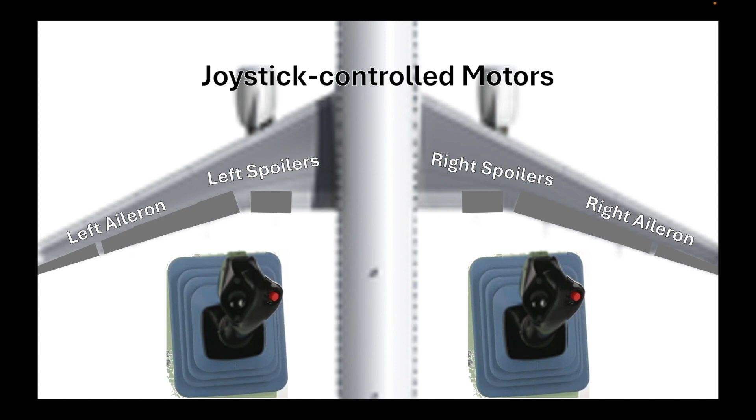If we look at the wings of an airplane carefully, you'll notice that there are ailerons at the outermost and spoilers at the innermost. To demonstrate what it means for a pilot to move the joystick of an Airbus 320 and how the wings would respond, let's look at this video.

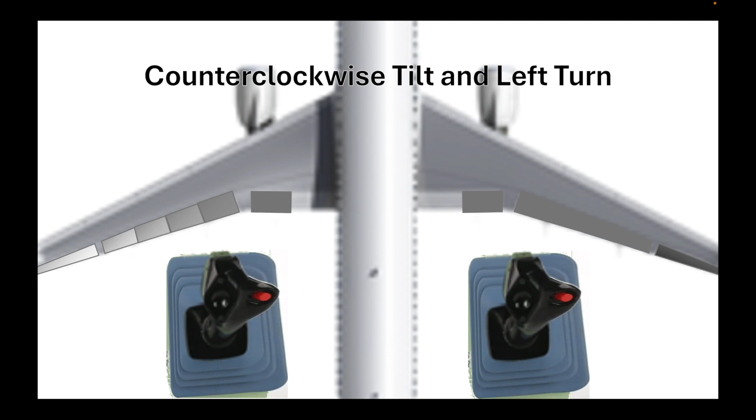If he moves the joystick to the left, the airplane would make a counterclockwise tilt because of the ailerons, where the left one will move up and the right one will move down, and a slight left turn because of the spoilers on the left that are being raised up, hence the spoileron effect.

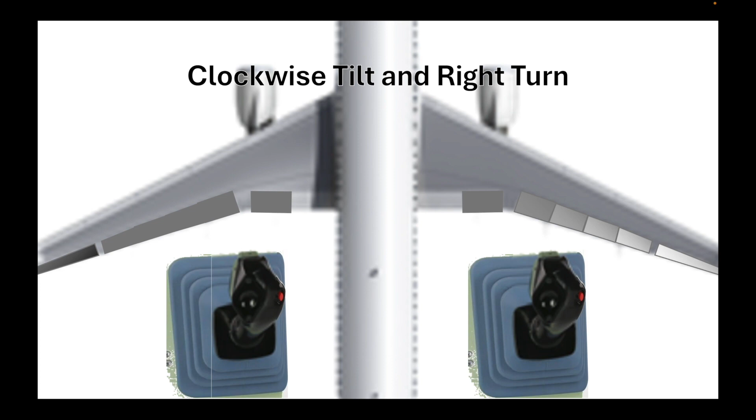In a similar manner, when the joystick is being moved to the right, the left aileron will go down and the right aileron will go up. Additionally, the spoilers on the right side will raise up. The overall vector force for this Airbus 320 in this mode is that it will make a clockwise tilt and a slight right turn.

When the joystick is being pulled backward, the airplane would pitch up. In a real Airbus 320, it's the elevator that will move up, not the flaps. But for the sake of demonstrating the wing movements, we will just imagine the ailerons as elevators. Since they're at the middle of the airplane, these ailerons would move downward, like flaps. Hence, flaperon mode: ailerons acting like flaps.

This creates an upward pitch. The elevators actually move upward at the back of the airplane.

During a downward pitch, when the joystick is being pushed forward, the elevator at the tail will move downward. But for the wing's sake, both ailerons will move upward.

Ailerons now acting like spoilers in spoileron mode. Since both ailerons are being moved upward, the spoilers on both sides of the wing will also move upward.

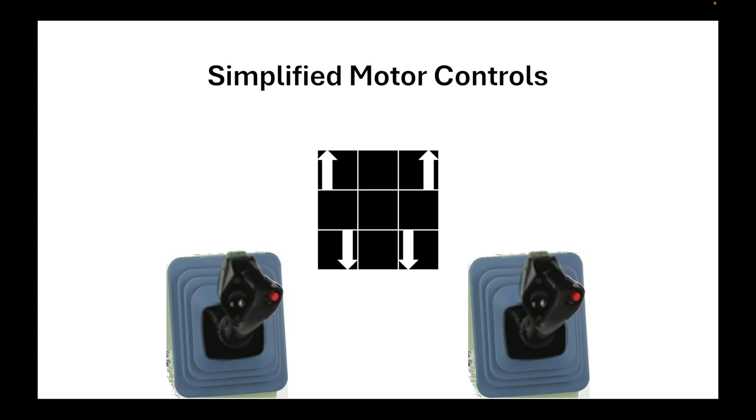It sounds like a confusing direction of the ailerons. Let's simplify the functions. That's the simplified motor controls, where only one aileron will move up or down, and in this case, the joystick will be moved on the corner: northwest, northeast, southwest, or southeast, not anymore north, south, east, or west. This makes it easier for us to create a fly-by-wire system for a model Airbus 320.

We have also simplified the wing design for this model. We only have 2 ailerons and 2 spoilers.

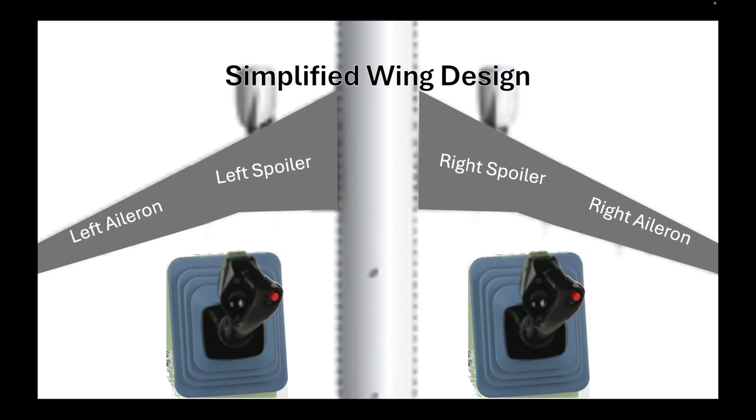When the airplane is being pitched upward and turned to the left, as well as tilting counterclockwise, only the right flaperon would move down. No other wing elements will move.

When the pitch is still upward and the tilt is clockwise and you're making a right turn, the left flaperon will move downward and no other wing elements will move.

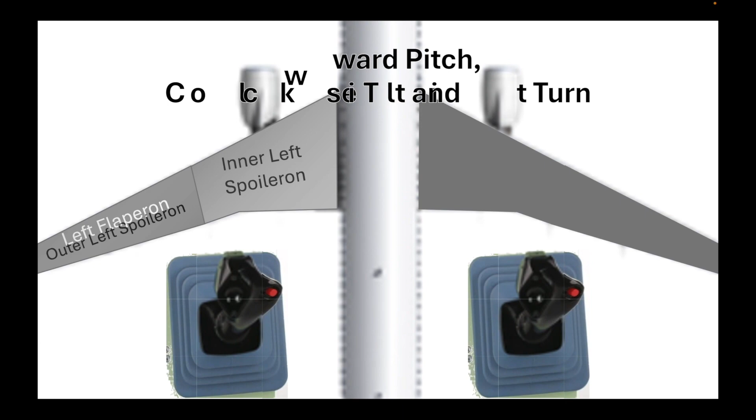But when you pitch downward, make a counterclockwise tilt and a left turn, the outer left spoileron will move upward as well as the inner left one. Essentially, all the left wing elements will go upward.

In a similar manner, when you continue to pitch downward, this time making a clockwise tilt and a right turn, the inner and outer right spoilerons will simultaneously go up. In other words, all of the right wing elements.

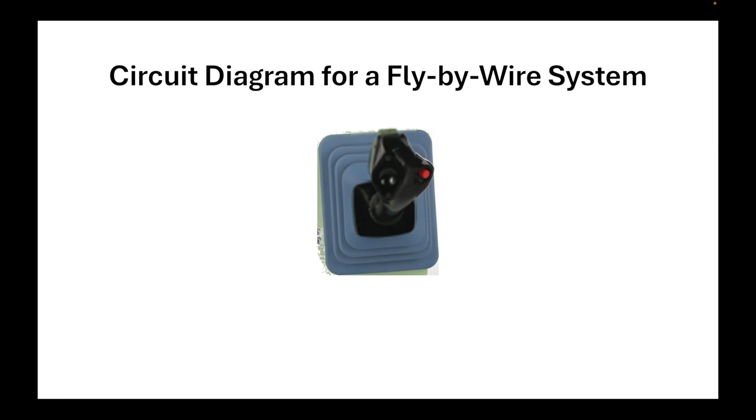There are 4 push buttons that are 4-pinned, wherein any of those 4 buttons have a corresponding aileron to move either upward or downward.

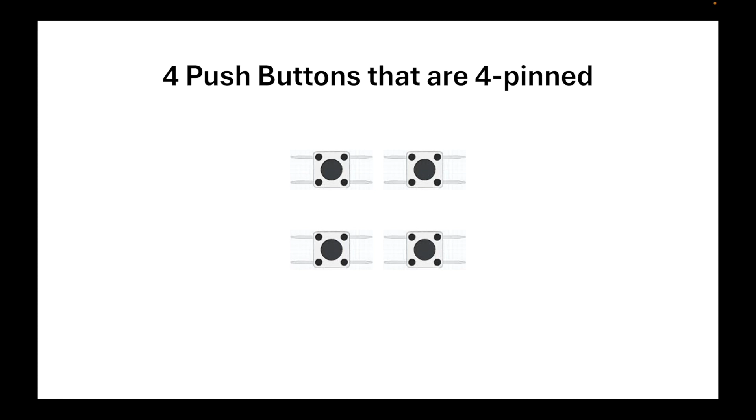You need 4 resistors that are 10 kilo ohms in resistance so that we can create an active high switch, wherein by default, the push button is in off mode. But when it's pressed, it turns on.

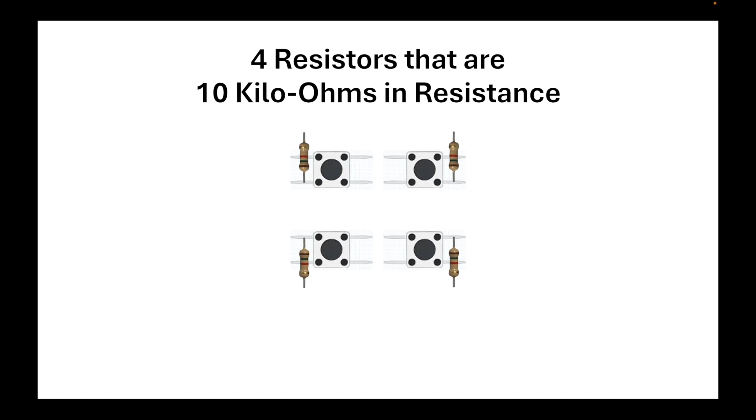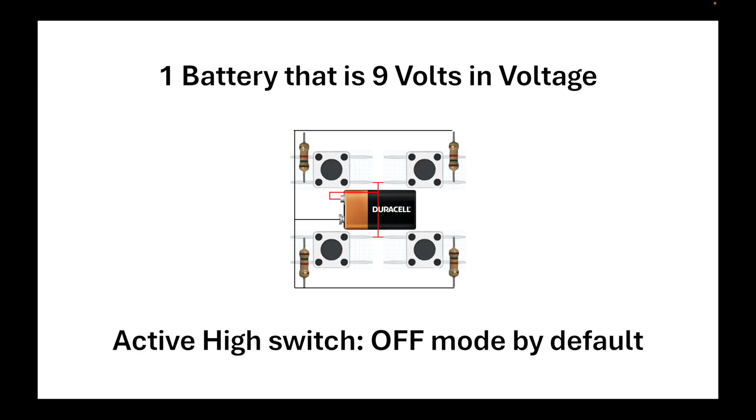We have to put one battery that is 9 volts in voltage so that we can create an active high switch for these 4 buttons. Those red lines refer to the positive terminal, while the black lines refer to the negative terminal.

After we have set up the battery, resistor, and push button, we will set an output for this fly-by-wire system using an integrated circuit that has 4 AND gates inside it. 1, 2, 3, and 4 refer to the output and input connections. They're physically connected, but to make it look cleaner in circuit appearance, we use triangles to represent those particular connections.

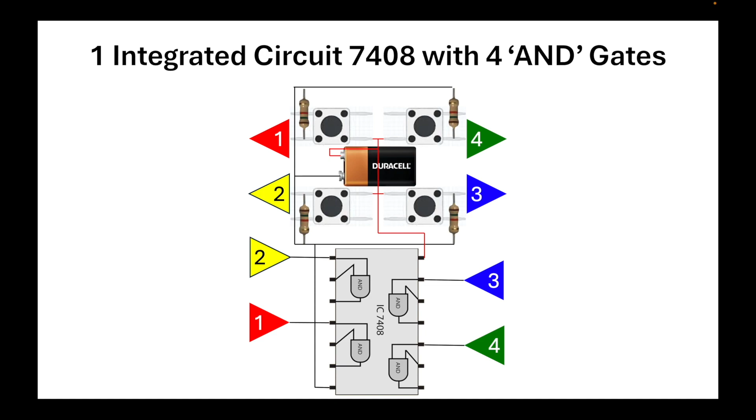We need another 4 push buttons that are 4-pinned so that the motor will not go on forever. Once it reaches its maximum deflection, either at the upward or downward most configuration, the motor will stop at a certain point. For these 4 push buttons, we will be using an active low switch that is on by default and off when it's being pushed, meaning that it has the reverse circuit of an active high switch.

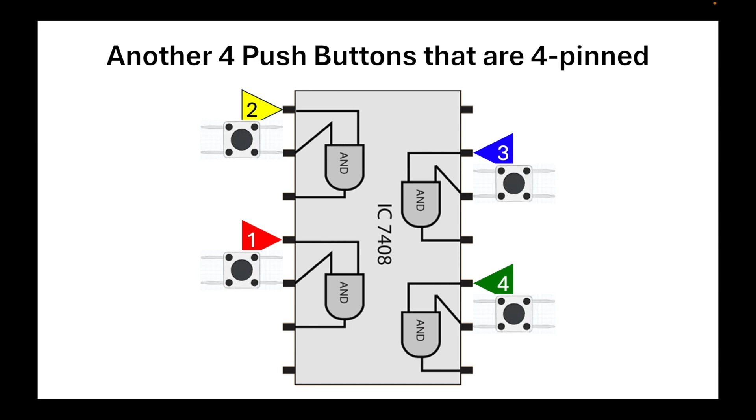We need another 4 resistors again that is 10 kilo ohms in resistance to protect the push buttons from getting destroyed. We use push button triggered outputs for conditional motor spinning, where the motor has a maximum upward or downward deflection to move those wings individually.

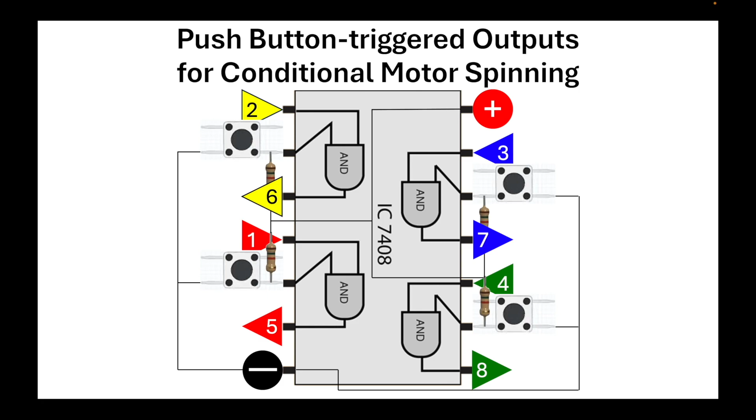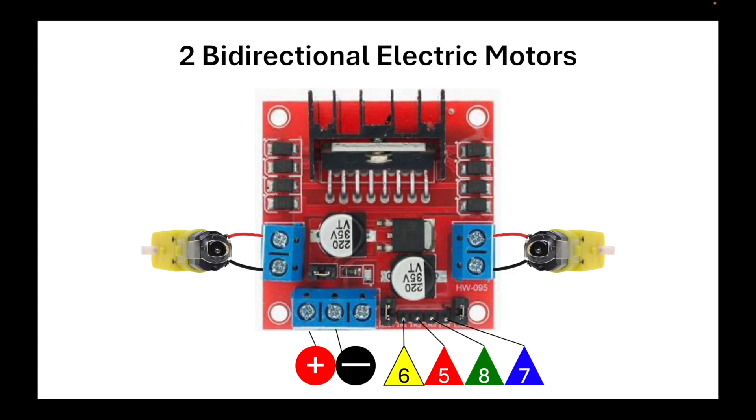We need a dual H-bridge motor driver so that we can move the 2 motors independently. We will attach 2 motors to this dual H-bridge circuit. And then the positive and negative terminals are connected down below. While those 5, 6, 7, and 8 connections refer to the 1, 2, 3, and 4 conditioned outputs, because of that active low switch that controls the maximum deflection of the wings that are motored.

Now, let's test the fly-by-wire system that we have just created.

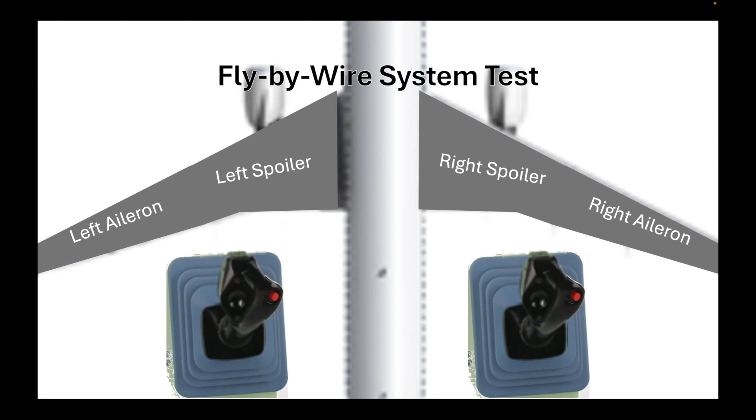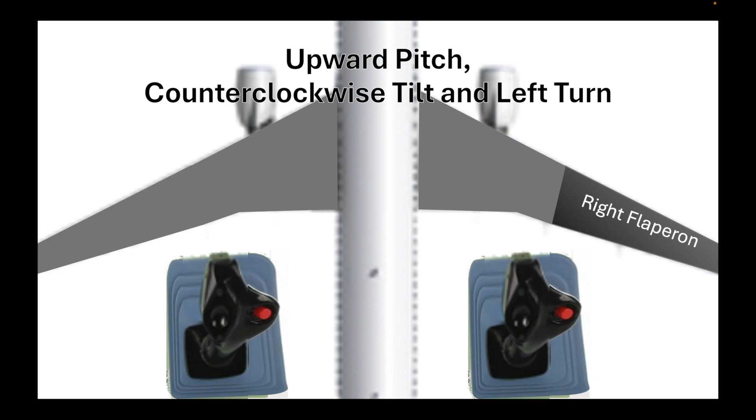First, let's start with an upward pitch, counterclockwise tilt, and left turn. Only the right flaperon will move downward and nothing else. When you pitch it upward, both flaperons will move downward. Again, the right flaperon will only move to a certain downward maximum deflection.

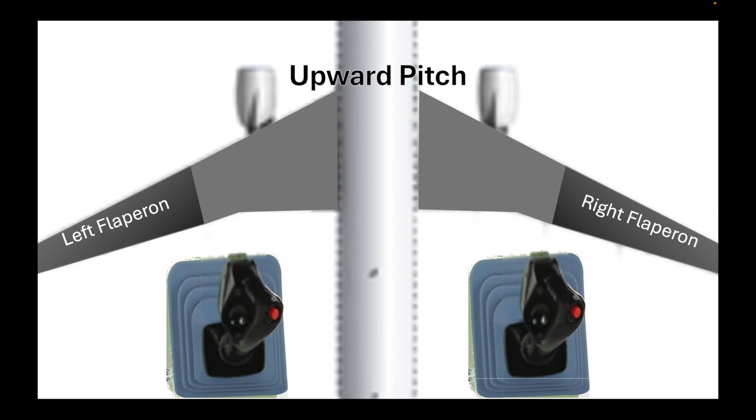But when you make a clockwise tilt and right turn, while still pitching upward, only the left flaperon will remain downward, and the rest of the wings are just retracted.

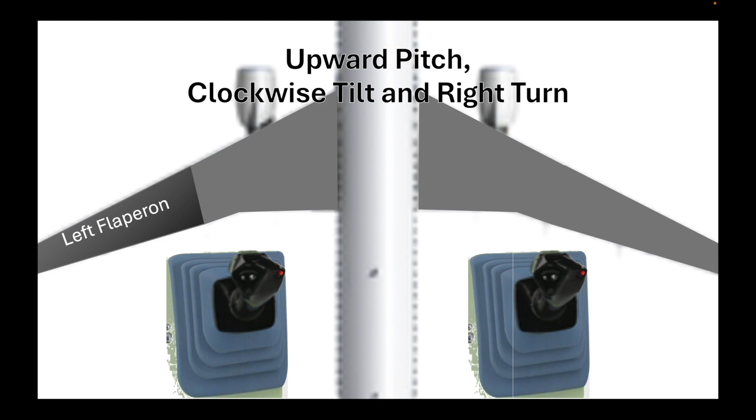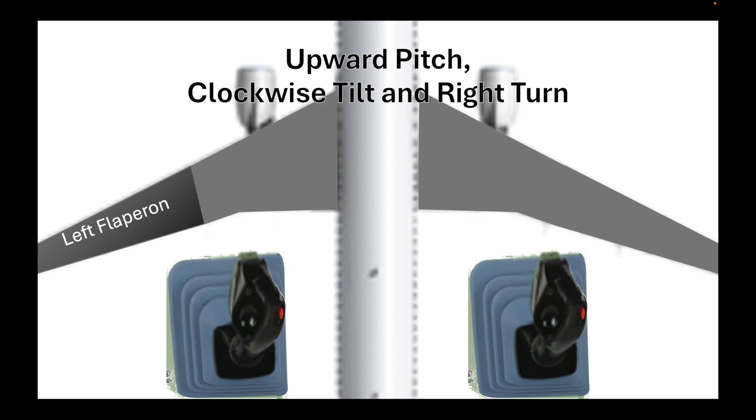Now the buttons, each of those four ones, have a specific assigned aileron to move. We push the forward right button on the northeast to retract the right flaperon. And then we put it back to its upward and pitched right mode, just like in a real Airbus 320 plane.

When you make a counterclockwise tilt and left turn, and the pitch is just 0 degrees, the left aileron and left spoileron will simultaneously go up. The spoilers are mechanically raised, whichever aileron is beside it that is going up. Meanwhile, the right aileron just goes down on its own, and the right spoiler is retracted.

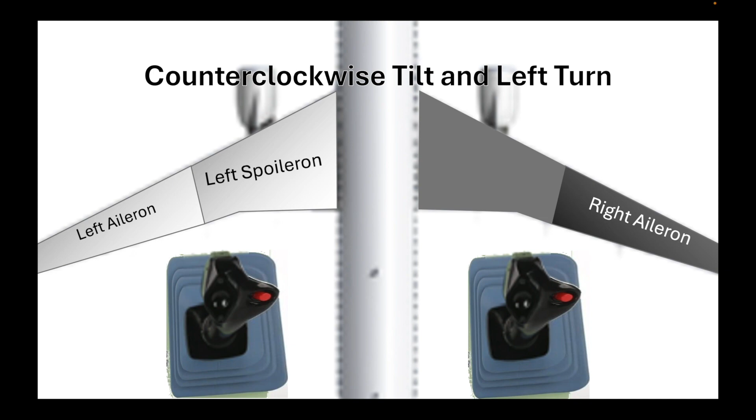This is achieved by moving the joystick to the left, that is, both buttons on the left side are being pressed at the same time.

Similarly, when you make a clockwise tilt and right turn, the right spoileron and right aileron go up simultaneously, while the left aileron will go down on its own, leaving the left spoileron as is, retracted.

This is achieved by moving the joystick to the right, pushing both buttons on the right side simultaneously.

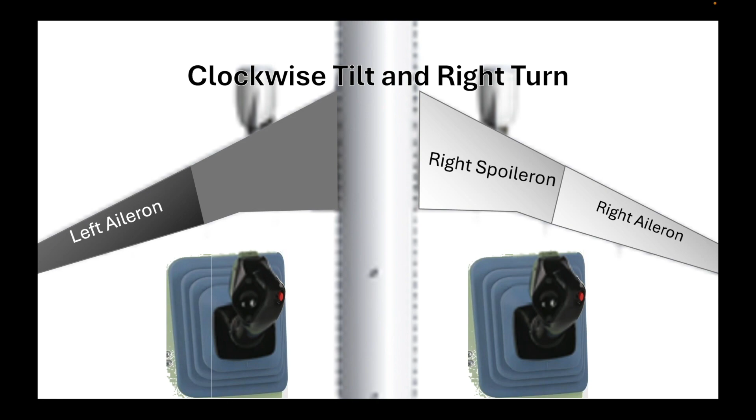But when you make a downward pitch, counterclockwise tilt, and left turn, only the left aileron will move downward.

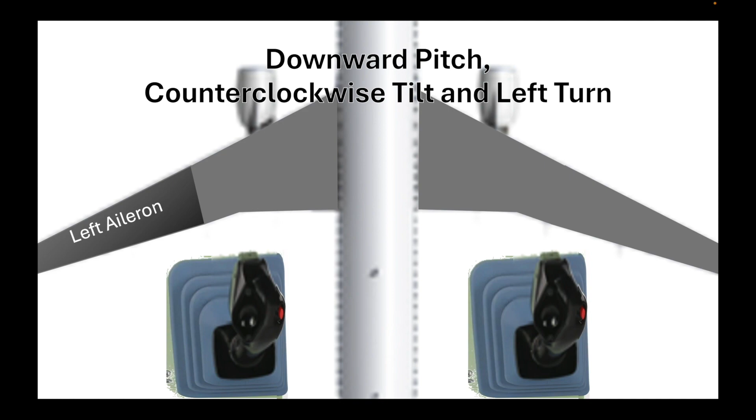But when you move it forward, the joystick, and also move it to the left at the same time, only the outer left and inner left spoilerons will move. In other words, both wing elements on the left side will be raised upward, while the right wing elements will just stay retracted.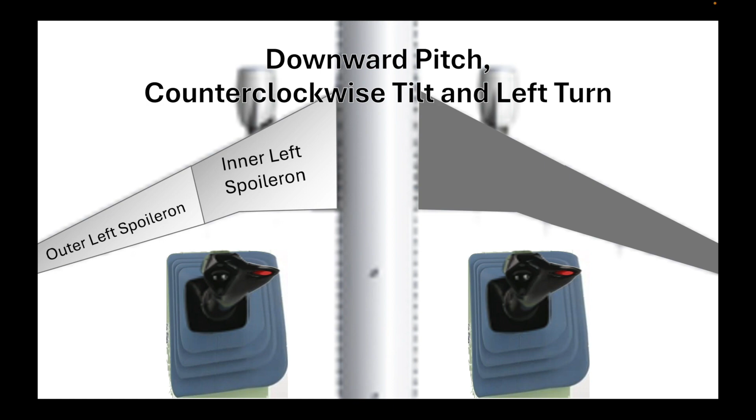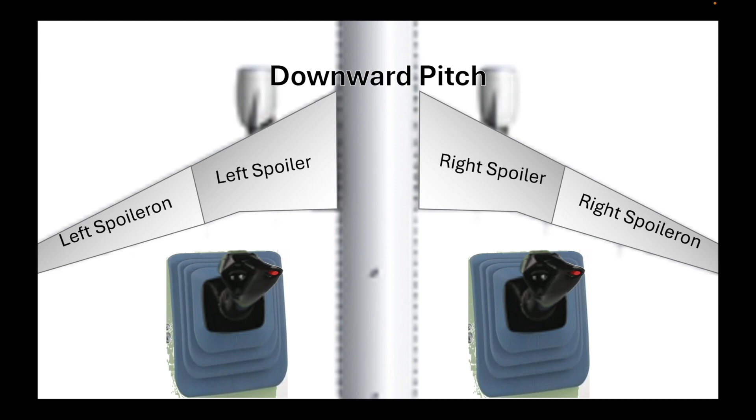But when you pitch downward, all wing elements will raise upward, like a grand spoileron. Since the left spoileron and left spoilers are being raised up a while ago, they will not move any further. Only the right spoiler and right spoilerons will raise up to catch up with the left wing element's position, upward maximum deflection.

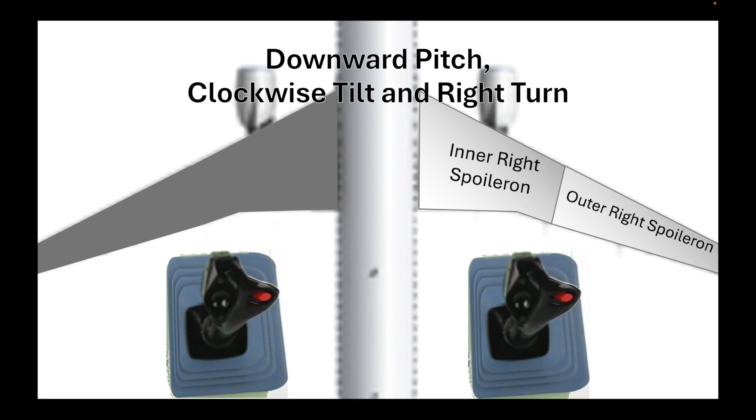But when you make a clockwise tilt and a right turn in a downward pitch, that is, only the right spoilers and right spoilerons will move upward. The right wing elements only move upward to reduce the speed on the right side. That is by pushing the joystick forward and to the right simultaneously, pushing the forward right button.